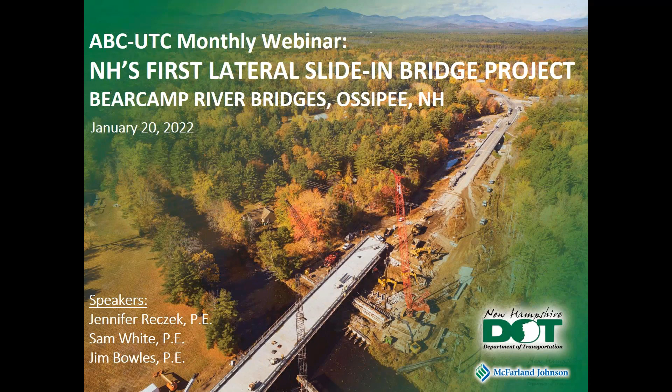We've broken the presentation into three sections. The first part, which I'll cover, is the why—in other words, other than it seemed like a fun thing to try, what factors led to the decision to use this technology. We'll also discuss some design considerations addressed during development of the contract plans, and then finally step through how these considerations and the resulting designs were implemented during construction. To start off, where is New Hampshire?

So this particular project was a pretty big one for us. It actually contained 3 bridges, two of which used the slide technology that we'll be talking about in this presentation.

This gives you a sense of where the project is in New Hampshire. It was located in the town of Ossipee, in east central New Hampshire, on a section of roadway where two principal arterial roads run concurrently. New Hampshire Route 16 runs north-south on the eastern side of the state—the primary roadway connecting seacoast New Hampshire and eastern Massachusetts up to the Mount Washington Valley, one of our premier recreation and vacation destinations. New Hampshire Route 25 runs east-west.

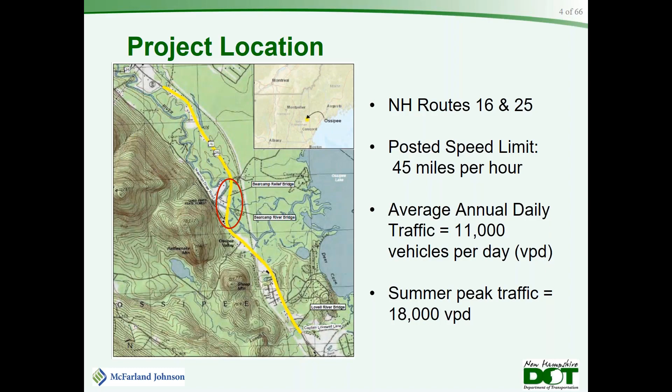Within the actual floodplain itself, there is a residential community of sort of summer vacation type homes, although some have been converted to permanent residences.

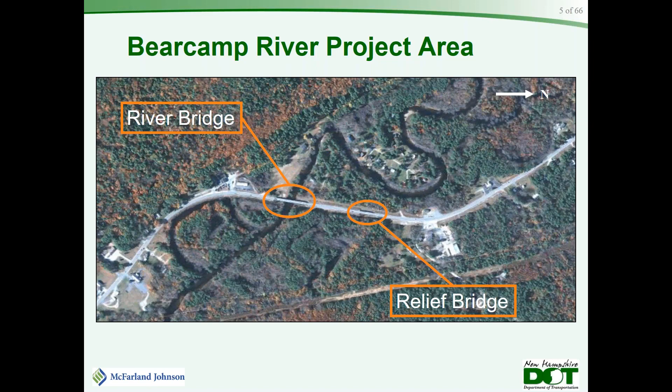This is an overview of the Bearcamp River Bridge. This was the former bridge. It was a 392-foot long, 5-span steel I-beam structure. As you can see in this picture, the end spans and most of spans 2 and 4 are actually located over dry land. Again, this is because under typical conditions it is dry, but this whole area floods under heavy rainfall events or when we get heavy snowmelt.

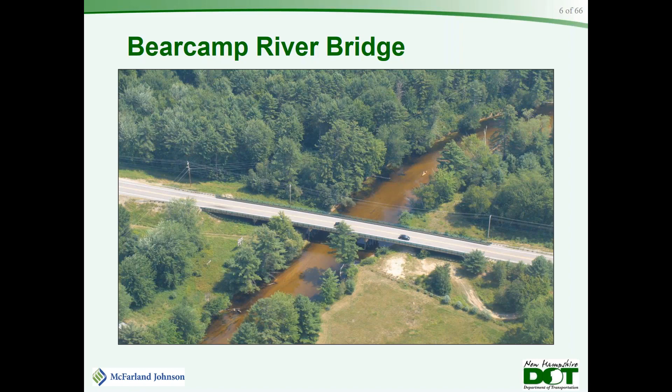This is the original Bearcamp relief structure. This one was a 168-foot long, 4-span steel I-beam structure, located on the northern side of the floodplain, providing additional hydraulic capacity. In the bottom right photo, you can see a little bit how the roadway is elevated up above the surrounding floodplain.

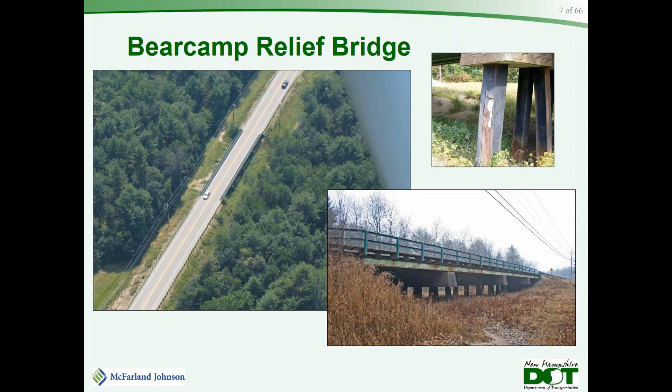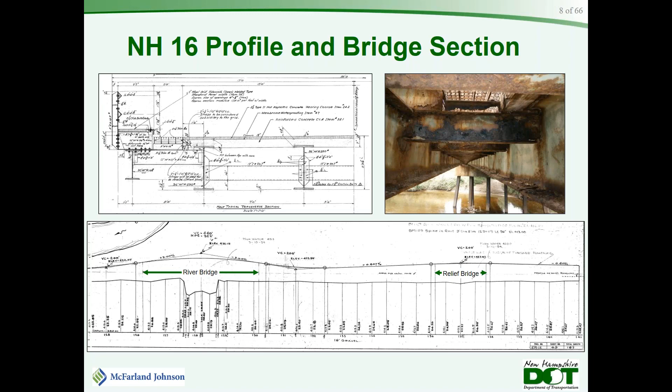At the top of this slide is the original typical section. With the exception of the girder sizes, this was identical for both structures. They were designed sort of interestingly for the bridge people in the audience: as simple spans under dead load and continuous under live load, which was a unique feature within the state of New Hampshire. They had 4 main girders with 2 smaller exterior girders under an open grate shoulder and sidewalk or curb section. Again, that's a fairly unique feature, but that's part of what led to their premature failure and ultimately their replacement.

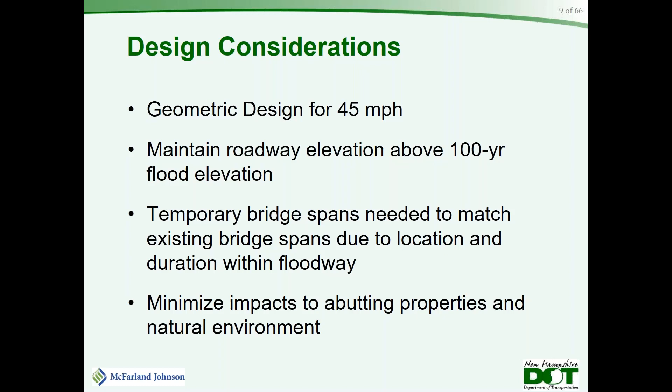So we started looking at temporary alternatives, and in the state of New Hampshire, we use the term diversion for an on-site rerouting of traffic. New Hampshire's typical approach is to look at a diversion first with a temporary bridge. We started looking at those alternatives, and then because of the temporary bridge cost and the amount of fill that would have been required to keep that temporary roadway above the 100-year flood elevation, we were basically constructing a new Route 16. So at that point, we also evaluated permanent alignments.

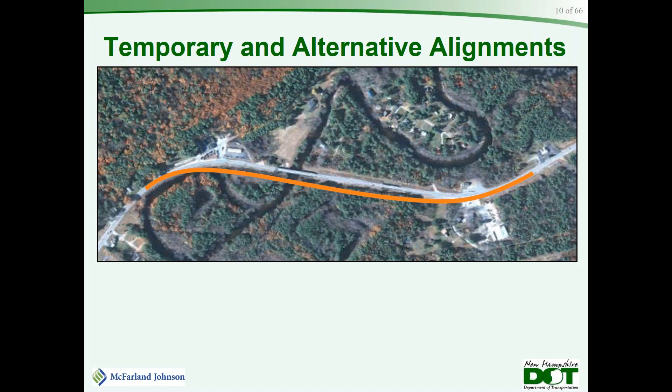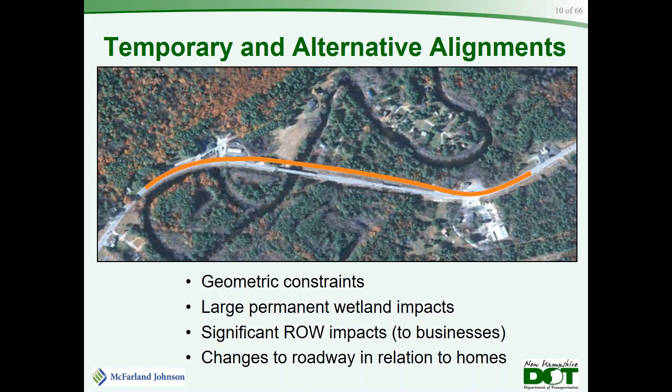Then we looked at a western alignment, both for the temporary as well as permanent. On that side, again, because of the way this section of road is located between these two curves, that also led to some geometric constraints. And in this location, we actually ended up impacting businesses, which we would need to relocate. So that was not particularly desirable. And we would also have been moving the roadway closer to some of those homes, which perceived or real led to concerns about noise, potential during future flood events, that sort of thing.

And so what we were finding is that this road really was in the ideal location. The geometry is pretty good, and that led to this question of, well, how do we build the bridges in the same location without that cost of temporary bridges and a diversion? And that's where the idea of doing the bridge slide came into play.

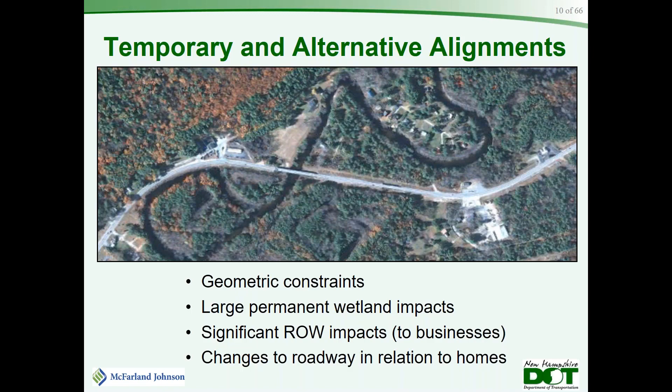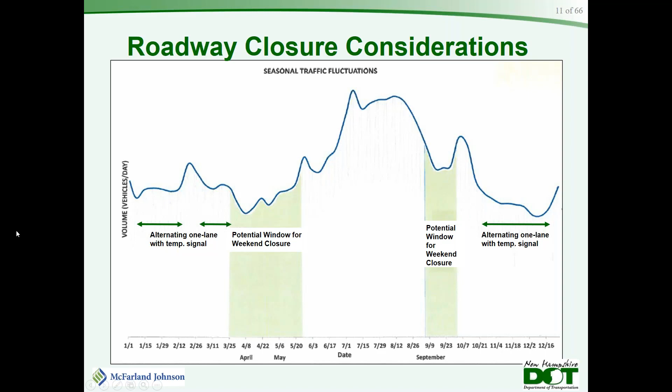One of the other big considerations that we had was looking at our detours. So how did traffic actually get around during closure weekend? And because of this location on really more of a regional route, we were really lucky. We were able to divert Route 16 traffic, which would normally travel here, onto state routes, which is our typical practice. And it's actually about the exact same length, within maybe a mile of one another in terms of distance. So for those regional travelers, there was very little impact.

New Hampshire 25 is this route. And so they were rerouted down. I think this added about 4 to 5 miles to that trip, again, for a regional traveler. One of the big advantages to this particular location, it's a little hard to see here, but there's a little purple line here, and that is actually a local road that paralleled Route 16 in the project area. That was open and available to local traffic that knew about it. So that really eased the local community's concerns about this closure.

Other benefits for this particular project location, it's located equidistant from 3 area hospitals. So no matter which way you went, it was about the same travel time. And it was also located in a place where there were local fire stations and emergency response within the Ossipee community on both sides of the closure. And those are represented by the little red Fs on the plan.

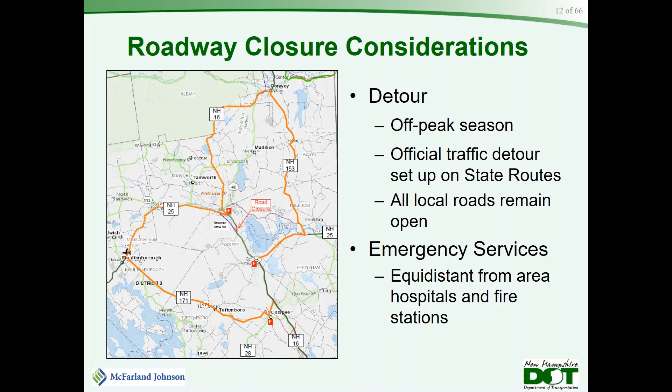So ultimately, when we pulled together the 6 alternatives, the diversions to the east or the west, the new alignments to the east or the west, we actually had a half and half, one diversion, one new alignment, along with the slide-in bridge construction. That was really a clear winner.

The wetland impacts, while we did permit some temporary wetland impacts on that eastern side, they are temporary and they'll be restored at the end of the project. The floodplain changes, there really are no appreciable changes. We maintained the clearances and actually improved them by slightly enlarging the bridges and removing some piers.

Right-of-way impacts, again, those are all temporary, so that was great, we can turn those back to the property owners. There were no structures or residences or businesses impacted as part of the project. The highway alignment was able to stay where it was, which was the ideal place for it.

We estimated that we saved about 1 construction season, and from a preliminary cost savings standpoint, we estimated a savings of about $2 million over having to construct that temporary roadway and temporary bridges. So the approval to move forward with this alternative was gained right at the end of 2015. And then from there, we went into the design.

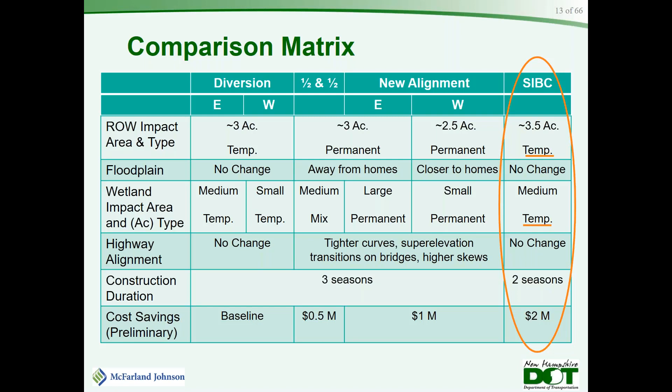This is a quick plan overview of the Bearcamp Relief Bridge. The new bridge is 170 feet long, a 2-span semi-integral straight steel girder bridge. This was the one we sort of affectionately referred to as the test bridge. It was not required to be installed first, but because it was over dry land and is the smaller of the 2 with no skew, we thought this would be the one the contractor would likely pick to do first, and that was correct. This one was completed in September of 2019.

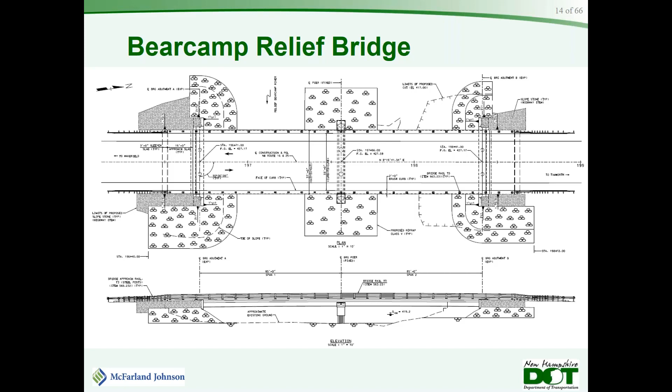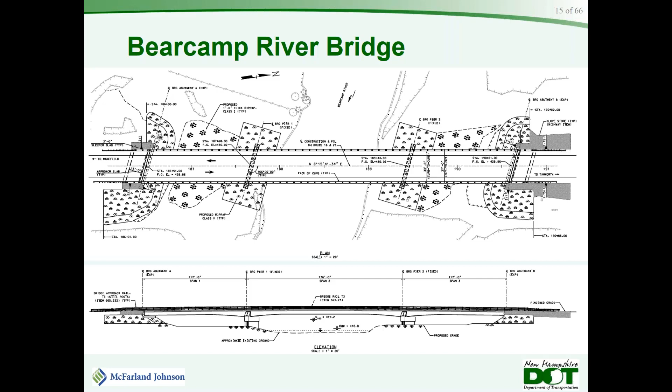With that, just around the time we gained approval, I was promoted within the department to the position of project manager and out of bridge design. At that point, we brought on McFarland Johnson to do the actual design of these bridges. So with that, I'll turn the presentation over to Sam White, who will share a little bit about the design.

Thank you, Jennifer. I'd like to start the design considerations discussion, acknowledging the design standards used for both of these bridges. Both structures were designed in accordance with the 7th edition of the AASHTO LRFD Bridge Design Specifications, which is our national standard. The AASHTO LRFD guide specifications for accelerated bridge construction served as a resource during design, but were fairly new at the time and came out during the design process.

The guide spec helped determine some of the forces induced by sliding the bridge, construction submittal requirements which we incorporated into our special provision for the slide, and it provided good commentary on layout control and tolerance considerations for delivering the bridge to their final location. Lastly, the NHDOT Bridge Design Manual was utilized for state-specific design requirements.

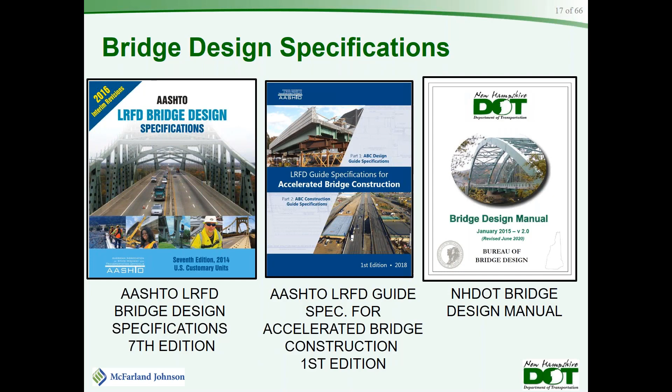These next few slides provide an overview of the replacement structures, giving more detail of what was built. Here's a typical section of the superstructure. Both the relief bridge and the river bridge are steel plate girder bridges with an 8-inch composite reinforced concrete deck. The out-to-out width of the superstructure is 37 feet, providing 2 12-foot travel lanes and 5-foot shoulders.

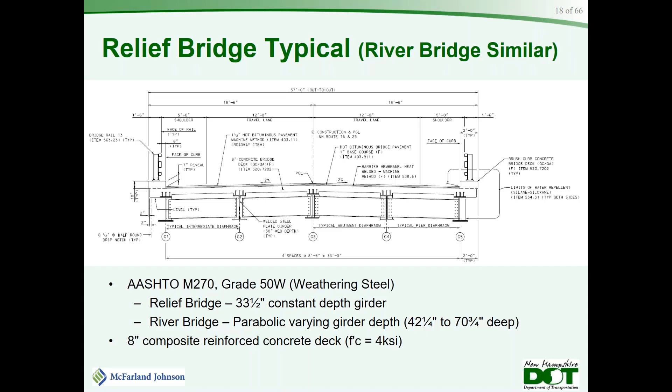This image is a typical section of the piers for both structures. Both structures utilize 30-inch diameter concrete-filled pipe piles.

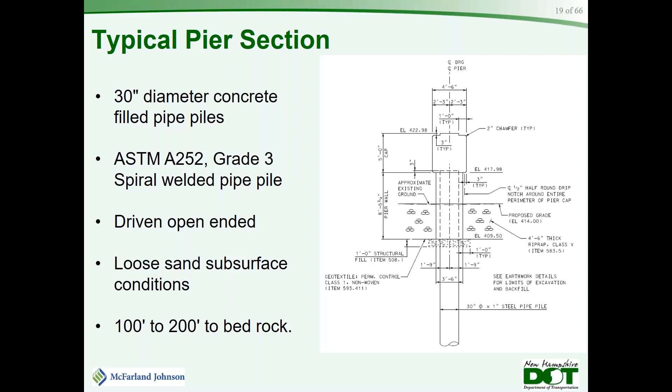One detail I'd like to point out with the typical section on the right is that little notch or recess up near the top, which seems like a small detail, but was built into the project to provide additional head clearance between the seat and the girders. That was to provide space for pancake jacks to be used to lift the bridge for future bearing replacements, but additionally for vertical jacking operations during or after the bridge was slid into place to remove temporary slide components. This graphic is an elevation view of the piers.

Each pier utilized 4 pipe piles that were located based on the existing bridge constraints, and there will be some more graphics later to help illustrate what we mean by those constraints. To facilitate the slide, the top of the seat needed to be kept level so that temporary slide support systems could be in place to move the bridge.

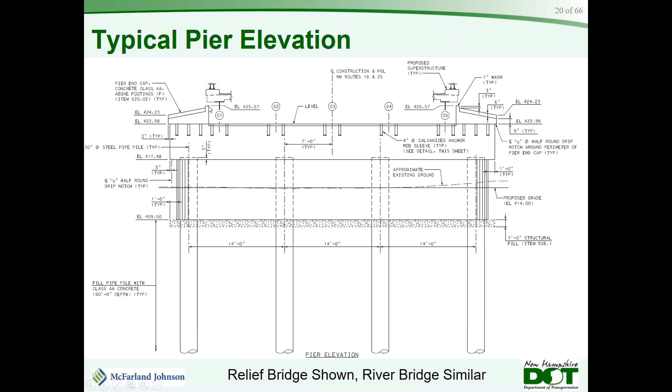What you will see across the top is anchor rod sleeves that were used to keep the seat clean, allowing anchor bolts for the bearings to be post-installed after the slide. Another component specific to the slide is that the pier cap is a bit wider than the existing or proposed superstructure. End caps were detailed to prevent debris buildup on those flat sections, and those were installed via additional anchor rod sleeves after the slide.

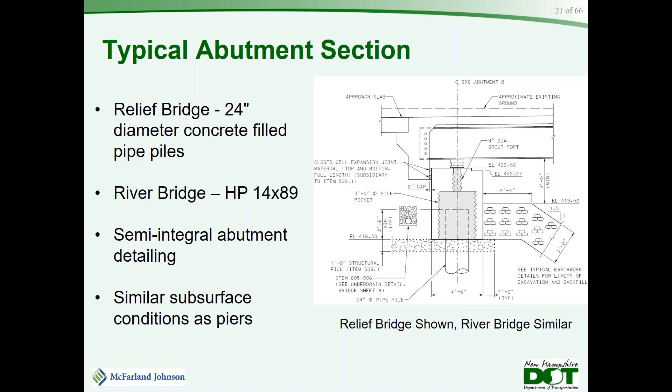This typical section shows the semi-integral abutment detailing utilized, such that the back wall came in as part of the bridge slide. You'll also notice here a similar notch on the front face of the abutments that also served for vertical jacking purposes in the final condition.

The idea during design was that these would be installed pre-roadway closure during the time periods Jennifer previously mentioned, where one-way alternating traffic would be allowed. This meant the piles and closure pour layout needed to be coordinated with the existing roadway geometry to allow for maintenance of traffic. Essentially, we couldn't close Route 16/25 while installing any of these precast pieces, or the piles for that matter.

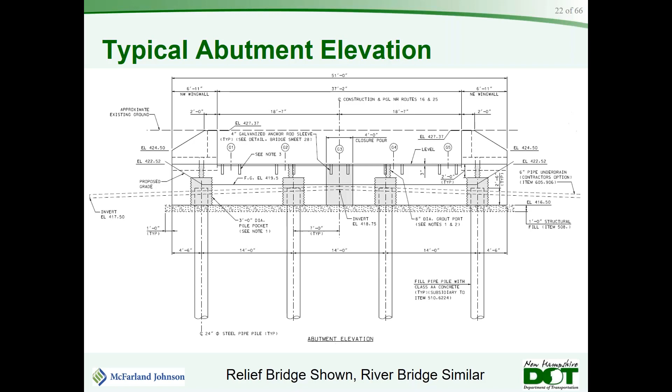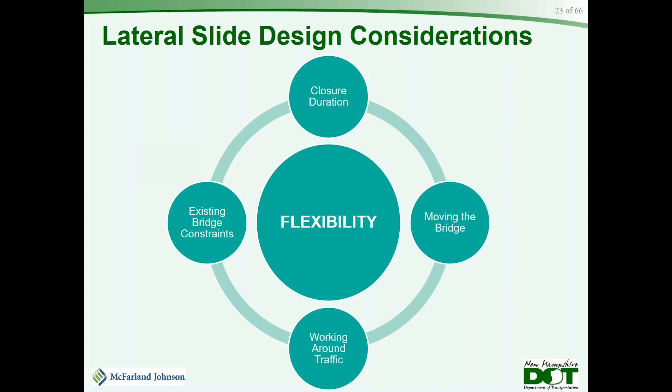Now moving into some more of the design considerations specific to the lateral slide. 4 major considerations were the closure duration, moving the bridge, working around traffic, and the existing bridge constraints. The central focus of all of these during development of the plans was to provide the contractor as much flexibility with our detailing as possible so that they could come up with a solution that fit them.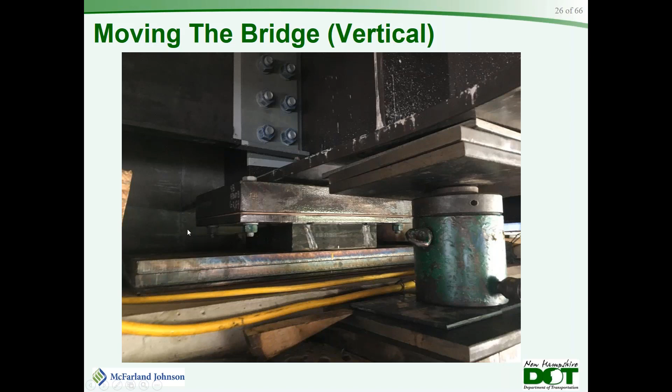Since the seat needed to be kept level to facilitate the slide, the bridge cross slope needed to be accommodated via varying thickness sole plates over the bearings - that's the meatier plate you see over top of the bearing. Those varied in depth to form the cross slope.

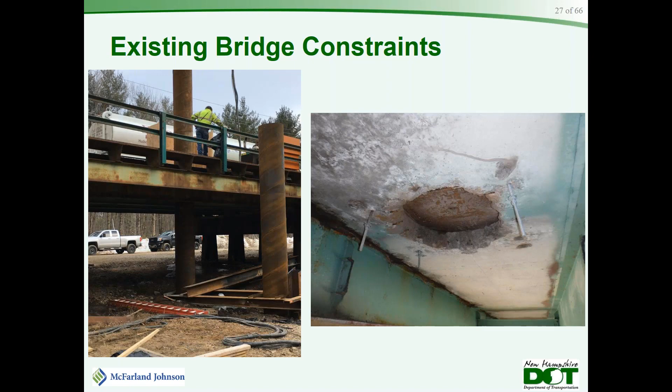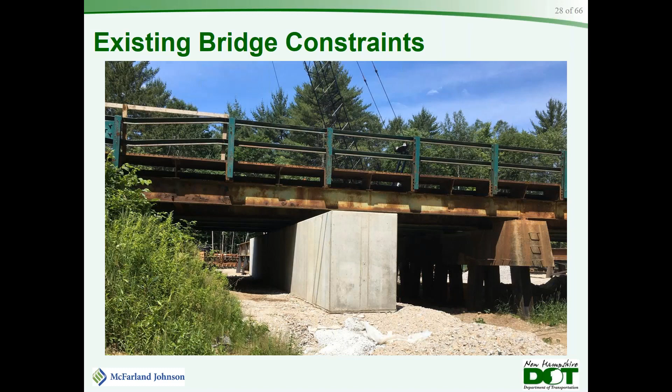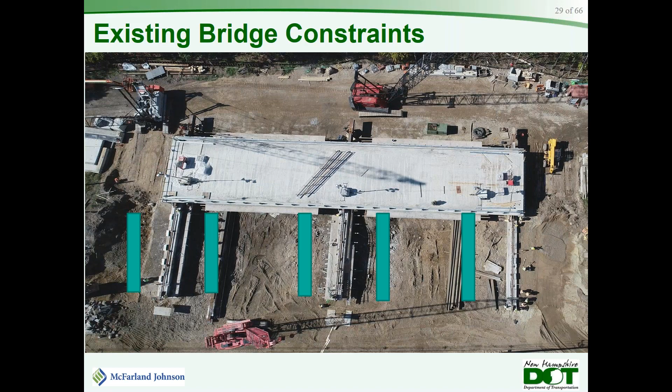The green rectangles shown are the location of the existing foundations. The proposed foundations were located to avoid these, as the existing bridge needed to remain serviceable during construction. The goal here was to provide a hydraulic opening that mimicked the existing bridge, as Jennifer previously mentioned. And while this image just shows the relief bridge, similar considerations were necessary for the river bridge.

Now I'm going to hand it over to Jim to discuss the construction aspects of the project.

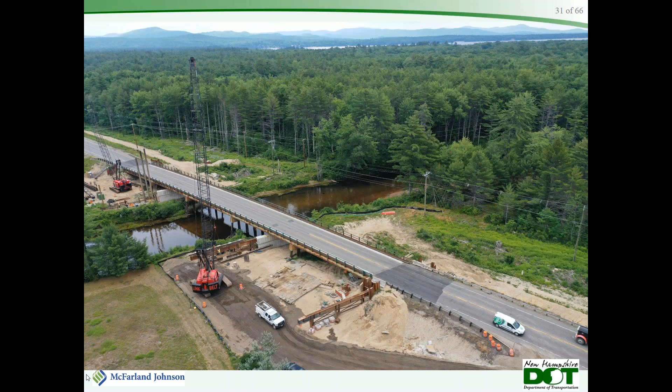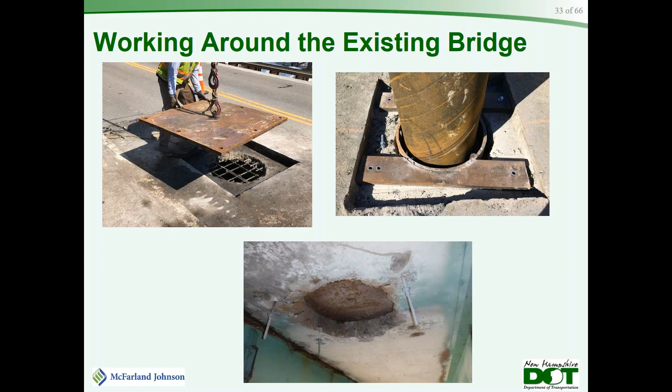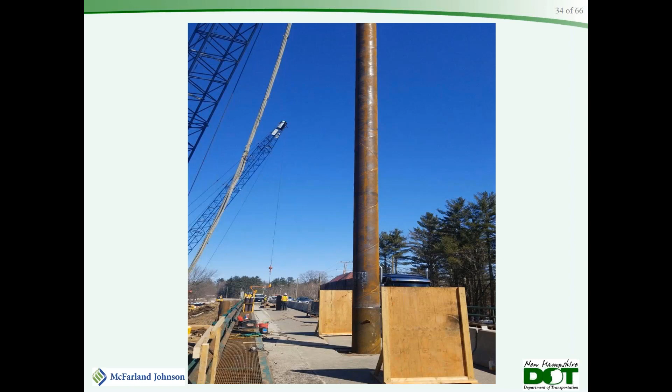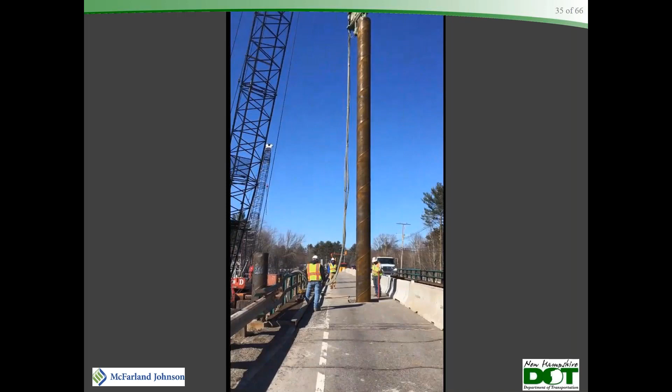Here we're driving a pile, and there was a lot of discussion during design about vibrating a pile through a red-listed bridge deck. But what we really found when we got out there was that we felt a lot less vibration standing on the bridge from this pile driving than we did from trucks driving over it. So it was really less of a concern than we had anticipated.

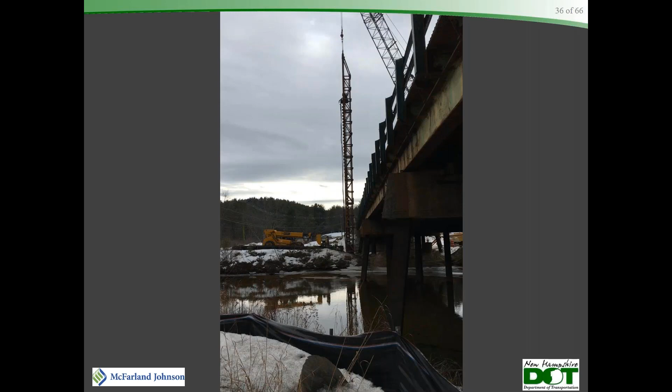Because of the theoretical scour depth, which was 40 feet, the top 60 feet of each pile had to be filled with concrete and a rebar cage. In most cases, a soil plug formed during the pile driving, but in some cases that plug formed a little too high up, so we had to use an auger, as shown in this photo, to remove some material and get down to the 60-foot level needed for the concrete and the rebar.

This just shows some completed piles—these are pier piles at the relief bridge. Again, this made a really nice practice bridge, we called it, out in the field, because other than during high water, you could walk all around it. You could move cranes around, and you could almost reach up and touch the deck. So it's nice to have that.

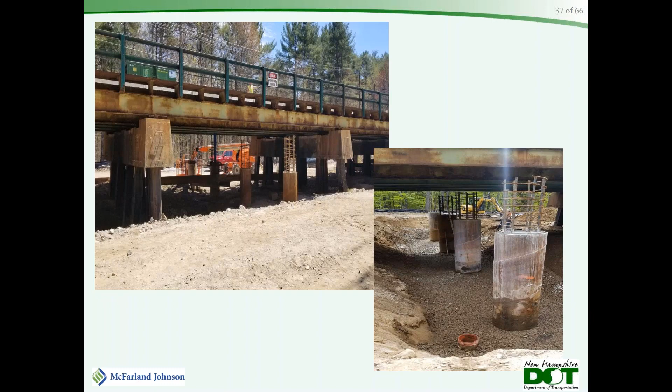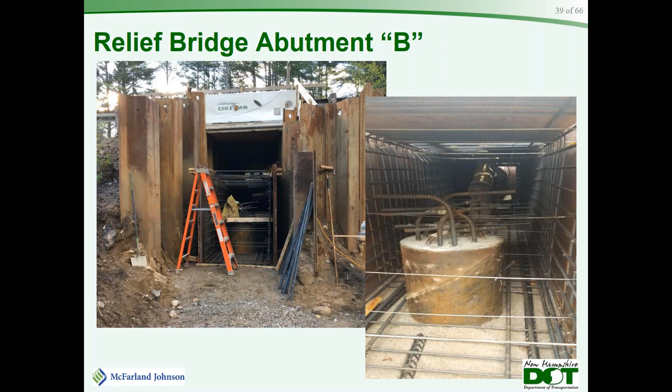As Sam pointed out, there are no raised bridge seats, so the bridge could be slid over. This is a good shot of the jacking shelf incorporated into the design, and then you've got the tubes for grouting in the anchor bolts afterwards.

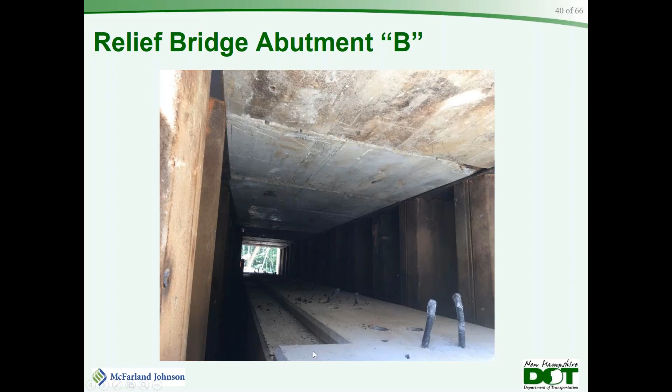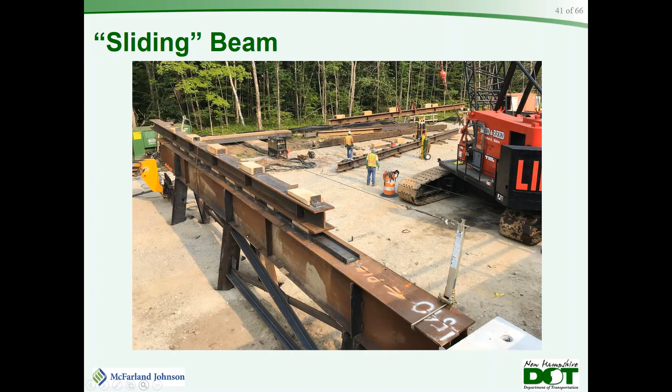This shows the pole beam, one of the pole beams sitting on top of one of the temporary piers. The bridge superstructure was actually built on top of this pole beam. Underneath the pole beam are Hillman rollers, sitting in this channel, which will be extended right across onto the new substructure. That acts as the guide when the bridge is pulled onto the new substructure. This shows the wood blocking used in place of the permanent bridge shoes - they weren't allowed to have the permanent bridge shoes under it while sliding. Also note all the marks on the bottom channel - we had those at each abutment and pier so we could keep track during the slide to make sure everything was moving equally.

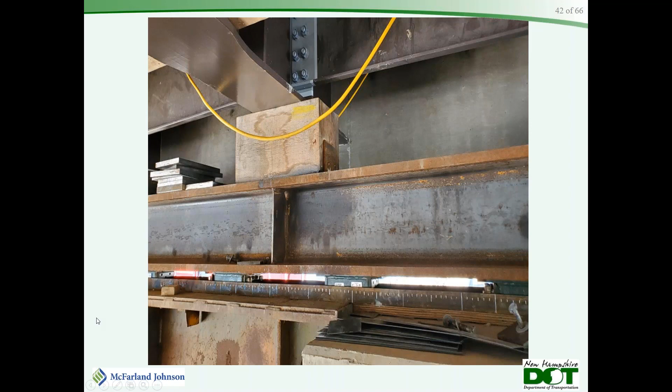This is a little further along on the superstructure - these are the parabolically curved girders for the river bridge. Again, you can see it sitting on the pole beam and the channel - you can't see the Hillman rollers, but they're right underneath there.

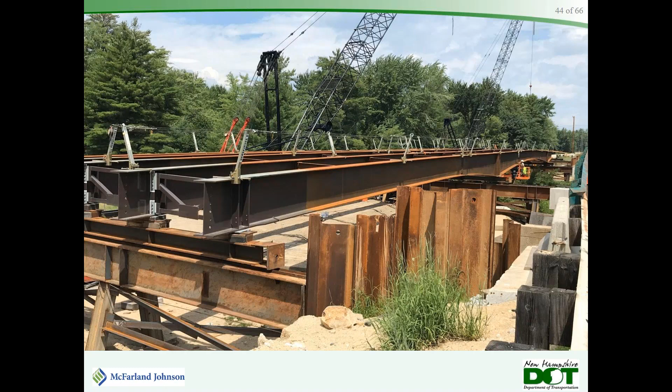Sort of conventional construction at this point for a little bit. This was a semi-integral bridge, both of them were, as well as the third bridge, which wasn't a slide bridge on the project. They're all semi-integral abutment designs, so the back wall and approach slab seats were all part of the deck.

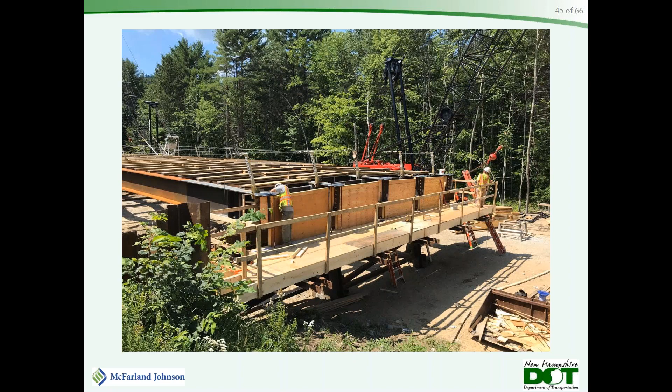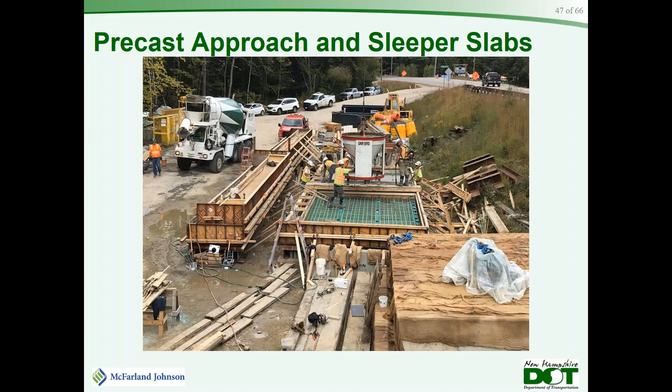This is just typical construction - you always want to dry run your screed, check rebar clearance, check proper cross slope, depth, all that. A lot of the precasting was done right there on site. You can see the green rebar, that's half of an approach slab. The long, thin things on the left are the sleeper slabs being cast, also done right on site by the general contractor.

This is one of those wing walls, precast wing walls that Sam talked about, partially stripped. Those were a challenge for the bridge carpenters, the foreman, and the resident engineer to sort out, but they came out really good - it was a very, very efficient design.

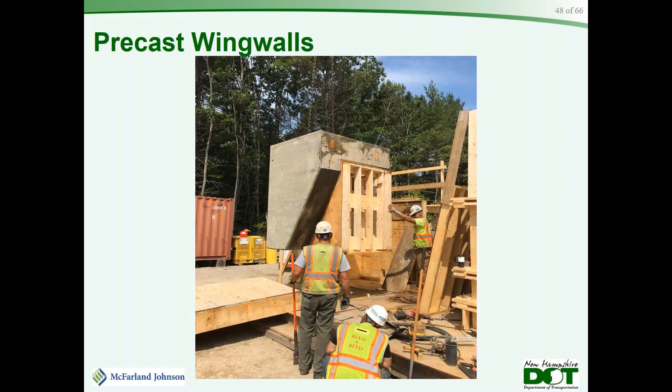And then this is starting demo. Demo is by far the trickiest and most dangerous part of the whole thing, both in terms of schedule and worker safety.

This is a picturesque scene during the demolition of the river bridge, but it was anything but relaxing, because during the river bridge the weather was terrible - cold, windy, rain. The poor guys in the full containment suits doing the cutting had their lenses keep fogging up, and their filters would get plugged up because of the rain, so they couldn't breathe or see. They started to feel the electric current through their gloves because they were so wet. That wasn't a good time.

Those of us watching the schedule saw us falling further behind - we were all trying to finish this one 12 hours ahead of schedule, like we did the relief bridge. The relief bridge had good weather, it went well, and finished 12 hours ahead.

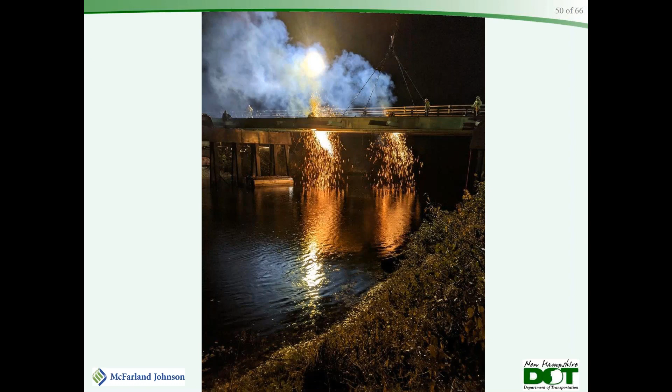This is pulling over one of the piers. You'll see the flanges have been cut except for the closest flange to shore, which is left as a hinge, much like you're felling a tree, for those of you that have done any cutting. So they just pulled it over in a nice controlled fashion and then went down and cut the rest of the flange.

You can see everybody's in rain suits. They're all pretty cold and wet by now.

This is pulling over another one of the piers. Now, I can tell you that pier right there, you could walk out to that. When we started the closure period, you could walk out to that and your feet would be dry. But it poured so hard that first night, the river came up and that thing was 30 feet from shore by the time we went to tip it over.

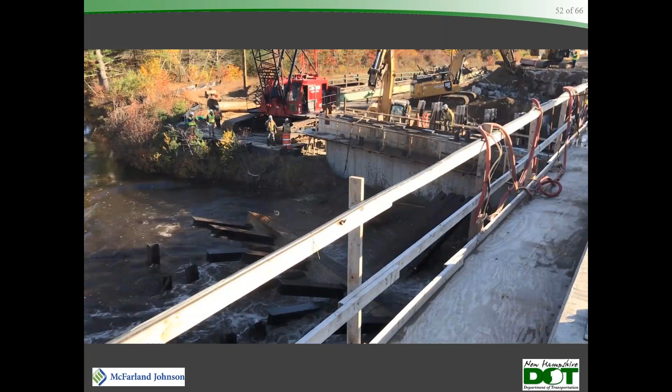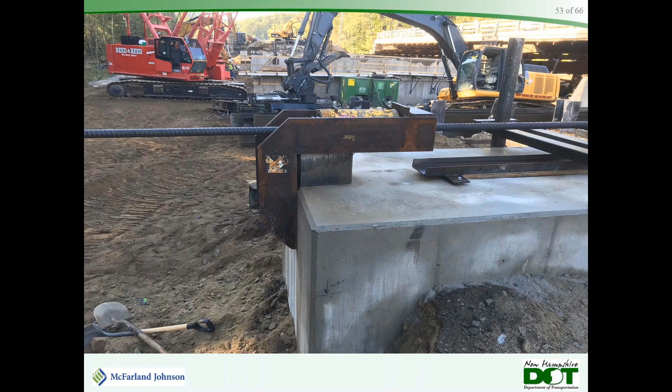This is the jacking setup, and you can see the hollow core jack, you can see the L bracket, and a Dywidag rod going through. And so you pull till the jack is fully extended, retract the jack, spin the nut, and then go again.

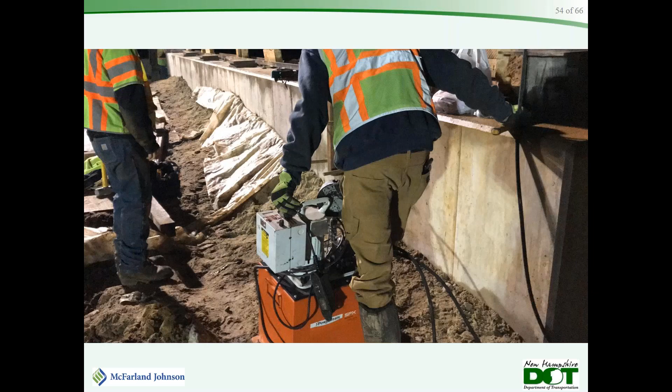And that's the hydraulic pump that runs each one of the jacks. We had one at each side. We found that trying to calibrate them off of one just didn't work, so we had radio communication between all the operators. So the whole power for this slide is 2 single-cylinder electric generators.

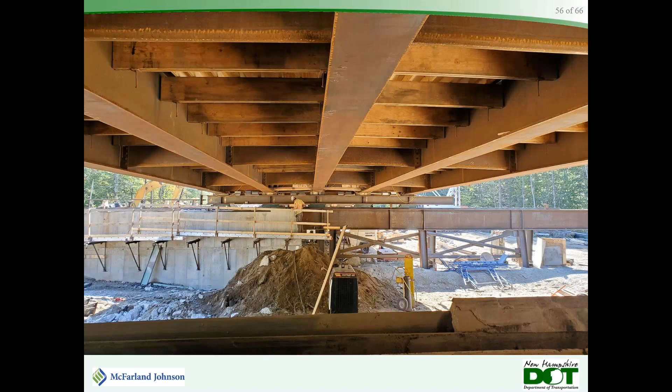And this is lowering. Lowering is much more difficult than pulling the thing sideways because you can only lower it so much at a time. So we replaced wooden blocking with these steel pipes and steel blocking for the second bridge, so we didn't lose so much in compression of the wood, and it made it go better.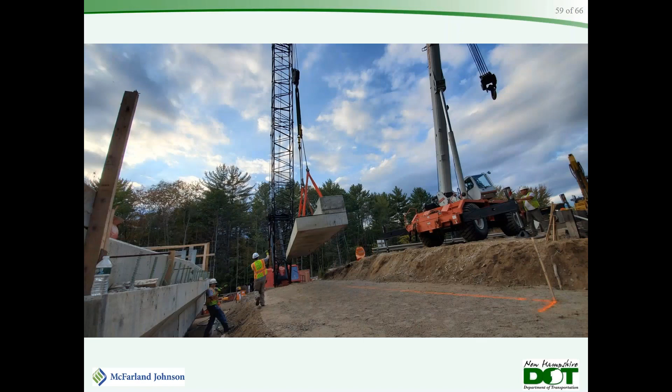And this is setting a sleeper slab. You can see the bridge still isn't put down, but you got to have things going concurrently if you're going to get done on time.

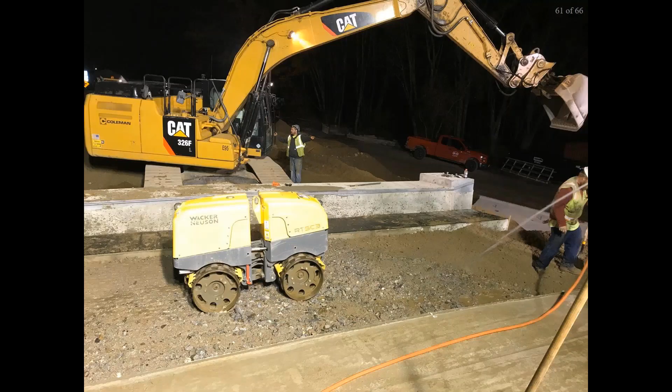And this is just some quality control to get things lined up. Compacting the backfill behind the abutment and in front of the sleeper slab.

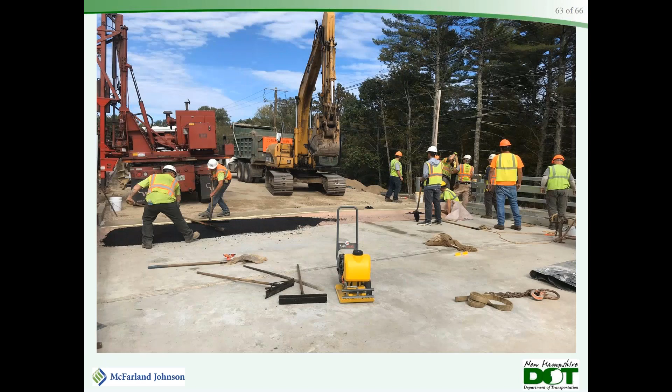This is setting half of an approach slab. Once that's set in place, there's still a 3 or 4 inch space underneath that gets filled with flowable fill through holes. And we opened the bridges prior to membrane and pave, so we had to put ramps, fillets at the expansion joint.

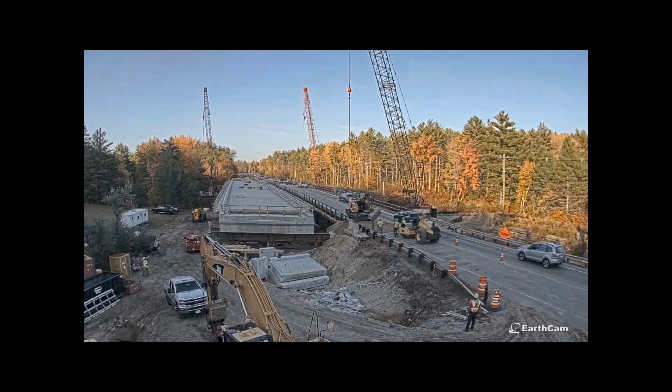And this is a 4.5 minute video, time-lapse video. You'll see in the lower left...

10 o'clock, we reduced the traffic to 1 lane while we saw cut half the bridge. Sort of got a head start.

And you can tell it's raining. Dots on the camera and everything, so including us. And it's cold in October.

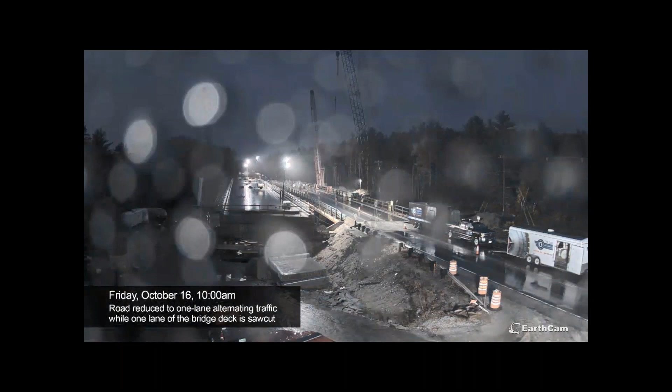Again, I can't emphasize enough that the most riskiest part in terms of worker safety and time, which all relate to cost, is the demo of the old bridge.

You never know, things are rusted. You don't know which has good support and what doesn't.

You see by 10 o'clock at night, the deck was removed. We start with doing the steel.

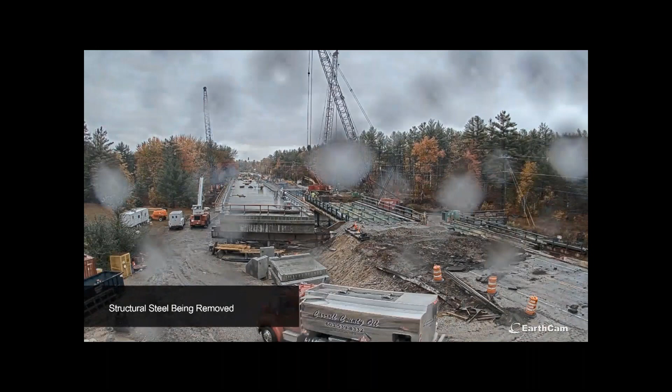It was cutting that steel that really set us back on this bridge. We were ultimately able to finish on time, but not 12 hours ahead.

When the sun came out, morale improved somewhat, but everybody knew we were behind schedule. And some people were still cold and wet too.

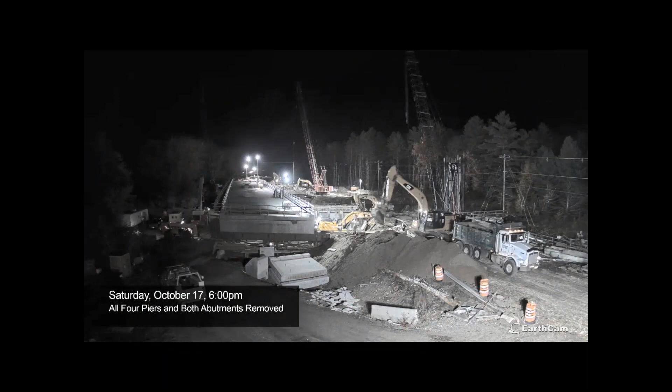There it goes. Again, this is probably the easiest part of the whole weekend, is sliding that thing across.

Using the Hillman rollers, no more than 2% friction. Hydraulic jacks with the Dywidag rods. A very smooth operation.

Lowering, even with the steel blocking and pipes, still takes longer, but it was much better. You got to have spare stuff though. You know, seal blew on a jack, a guy got covered with hydraulic oil, but they had an extra jack to throw right in there.

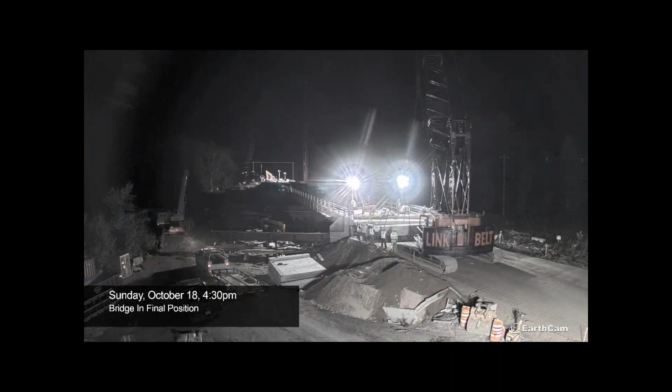And you see setting the sleeper slab. This end, there's similar operations going on in the other end. The closest one you can see better, the sleeper slab's there.

They're going to swing up the approach slabs. Once those 2 halves are set, and you get the flowable fill under, you get it.

There's a closure for in between those two halves, and that becomes the critical path because you got to get design strength before you can open the bridge to traffic. And for us, that was 20 hours to get the design strength.

We had extra cylinders being tested at our materials and research laboratory. They were on standby. We were talking to them all through the night.

And again, the bad weather prevented us from opening this one 12 hours early like we did the relief bridge, but it was still a success because it opened right on time and under budget.

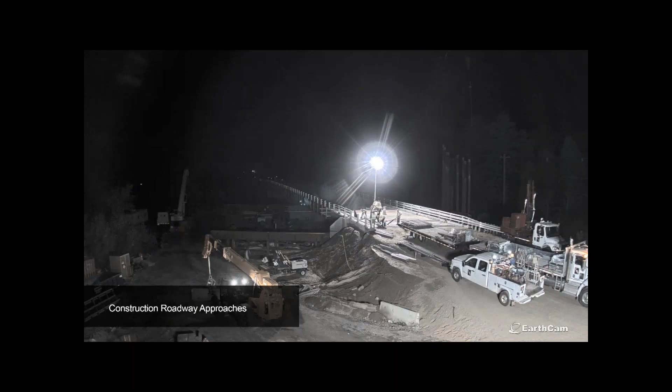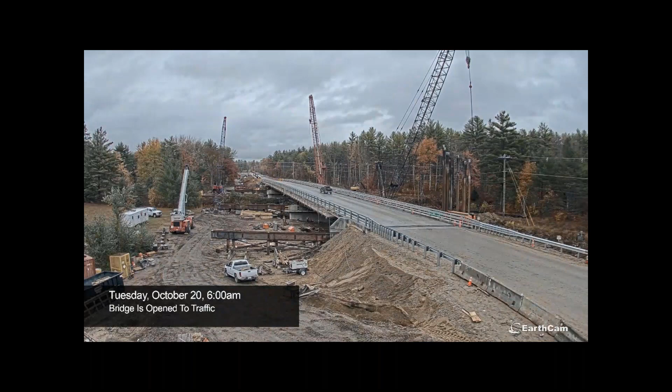We had a lot of media attention. It's a big deal to the public. We had good buy-in, a lot of positive comments. DOT and the contractor, everybody involved got a lot of kudos for this.